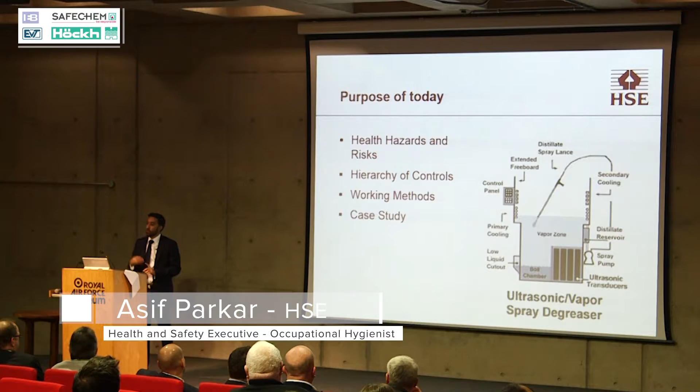Within the case study is an experience of one of our inspectors who is local to our office, and we'll be looking at specifically what the outcome was, looking at the bad practice and looking at what we could have done in that instance to improve the situation.

Okay, I'm sure you all know what solvent degreasing is, but briefly, solvent degreasing or solvent cleaning is the physical process of using organic solvents to remove grease, fat, oils, wax or soil from various metal, glass or plastic items. Historically, there are 5 main types of degreasing, one of which is hand degreasing. That is the application of a solvent by hand, removing during the cleaning process.

And then you've got the 4 main areas which I'm sure all of you know a lot about. So we've got cold cleaning, open-top vapor systems, conveyor systems and enclosed closed systems. Cold cleaning, generally speaking, this solvent is cold and then you apply the product within the area itself. And then more commonly you've got vapor degreasing, which applies to open-top conveyor systems and enclosed and closed systems. However, you can have cold cleaning systems which are used in the conveyor form.

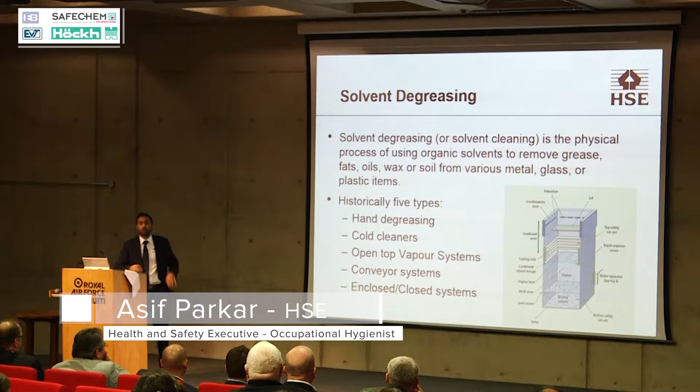What we are starting to see a lot more of within the workplace, which I've been advised by a lot of inspectors locally to me, is within the industry you're tending to find that a lot of organisations are moving to closed systems. And that's a good thing because obviously you are reducing exposure, reducing occupational exposure levels. There are also many benefits of doing that as well. What we've been advised is that there is higher productivity, and also we've been advised that the plant itself lasts actually a lot longer, duration of use. And also, more importantly, you're using less and less solvents as well. So that is a good change within the industry itself.

When you do decide vapor degreasing is what you should be doing and is the preferred cleaning method in that instance, though, you need to understand ways of improving the plant potentially that you currently have.

So we'll be talking about areas where we can improve plant later on in the talk. Obviously, adopting good practice, there are a lot of things you can do which could reduce exposure within the workplace. And also, fundamentally, you need to examine the benefits of using modern day plant.

Because obviously you might have plant in place, but it might be far more beneficial in terms of reducing the risks and health hazards in implementing a newer system within the workplace. Okay, so common solvents that we potentially use within the workplace: the most common ones are your chlorinated type solvents, things like trichloroethylene, dichloromethane, tetrachloroethylene, and also N-propyl bromide. They're probably the most common types potentially used within the workplace, and we are trying to phase these out as far as we reasonably can.

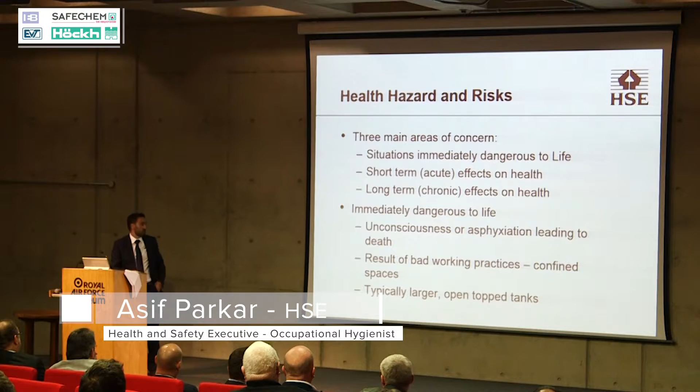A lot of open top degreasing tanks nowadays are quite large, so for example, if you are going into the area to clean out the degreasing tank, you will be exposed - the area itself could be defined as a confined space. And what we'll also be looking at is short-term acute effects and long-term chronic effects, which I'll be talking about in the next couple of slides.

So, with degreasing, there have been serious incidents which have occurred. What you need to take into consideration is when degreasers are being maintained - this has been the case even with enclosed systems. So if you are involved in enclosed systems, do ensure that you have the correct procedures in place. You should always have good working practices and standard operating procedures in place when undertaking any of these types of works.

This has also occurred when tanks are being cleaned out. So if you are cleaning open degreasing tanks or any form of tank, do ensure you have the correct measures in place. When solvent is being replaced is another big problem that we have within the workplace. What you find is, for example, when you add cold solvent within a hot degreasing tank, that solvent will quickly vaporize within the air itself, causing an extremely large exposure to that potential substance within the area.

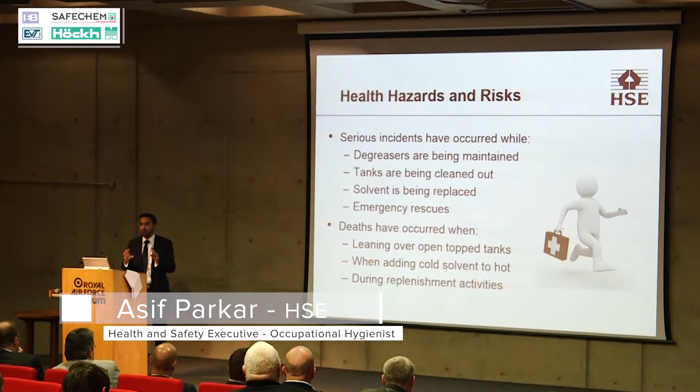So in essence, you're getting a very high exposure very quickly, and deaths have actually occurred as a result of that. Emergency rescues - this is also a very, very important point.

For example, say there's been an incident within an area, you need to ensure that you have safe working procedures in place when involved in any rescue, or it might be, say for example, a large spillage. You need to ensure that you have the relevant cleaning procedure in place in those instances.

Also, other scenarios - deaths have actually occurred when leaning over open-top tanks, and also during replenishment activities. I talked about how when cold solvent is added to hot solvent, it quickly vaporizes within the air itself.

Generally speaking, acute effects are short-term effects. These effects generally occur straight after exposure. Common types of effects with solvents are dermatitis, and also defatting of the skin. We've got an example there showing dermatitis as a result of exposure to solvents. You've also got various narcotic effects - dizziness, nausea, headaches, fatigue as well.

What I'm going to talk about in detail here is exposure to dichloromethane, because this has been an area where we've seen a lot of incidents occur recently within the workplace. Dichloromethane itself, within a poorly ventilated area, even when exposed to small amounts, can produce very, very high concentrations within an area very, very quickly. There have been some instances recently whereby exposure to dichloromethane has actually led to death within the workplace.

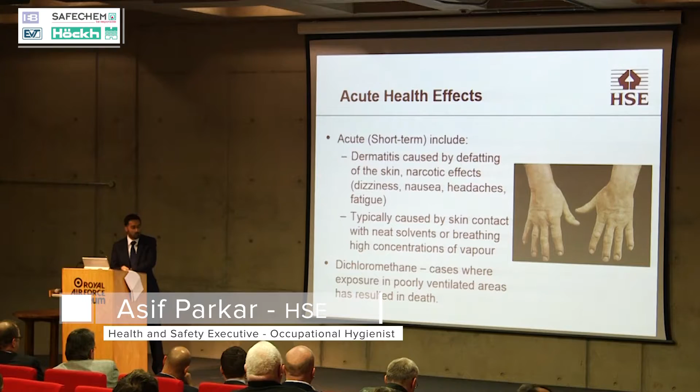The other effects from solvents within the workplace are our chronic effects. Generally speaking, you're exposed to small amounts of a solvent over many years, and then over time the effect may then happen. So you've got things like liver diseases, nervous system damage, and dermatitis.

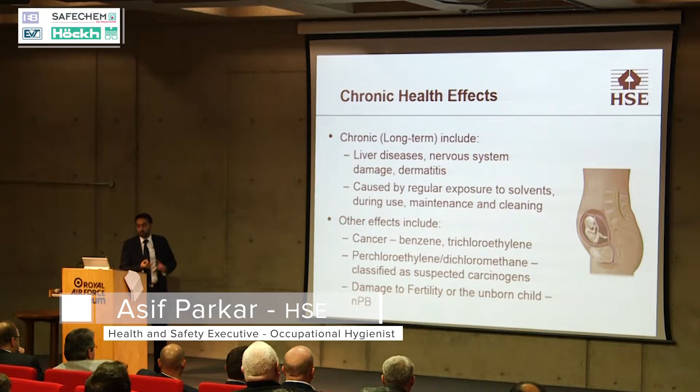This can also occur from maintenance activities and cleaning. Some of the common solvents we've got within the workplace - benzene and trichloroethylene, which are known carcinogens. You've also got perchloroethylene and dichloromethane, which are classified as suspected carcinogens, meaning there isn't enough evidence to determine that it is a carcinogen, but it is suspected. And also NPB, N-propyl bromide, is known to damage fertility and cause harm to an unborn child.

So what we need fundamentally is a suitable and sufficient COSHH assessment. This will show us how we can use this substance safely and put the relevant controls in place for us to work effectively and safely with that product itself.

So what we do is gather information on the solvent itself, through various sources. The first place we'd all probably look at is the material safety data sheet. This will give us specific information about the substance, the potential toxicology, any exposure limits, and it will give you pointers in terms of controls for using the substance itself.

What you also need to understand is how the substance is used within the scenario. If you are working with degreasers, you need to understand the process and also think of the secondary tasks as well. You do need to have COSHH assessments in place for the cleaning and spillage side of things, understanding all the different processes involved, because there is potentially high exposure within these activities.

Say, for example, you are cleaning within a degreasing tank - think how employees are exposed and the routes of entry. We've talked about inhalation, ingestion, skin contact, and skin absorption. Do understand all these routes of entry and make sure that is considered within the COSHH assessment itself, and also the extent of the exposure.

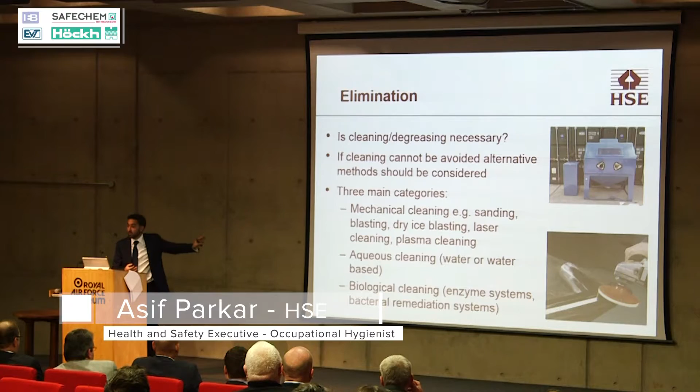What you do need to bear in mind as well is by introducing these different methods, the same principles still apply. You'd still need to take into consideration the hierarchy of controls, make sure you have the adequate COSHH assessment in place, but also you need to understand the other health hazards and risks associated with those. So say, for example, I've got the example in the bottom right-hand corner whereby someone is using a grinder - there will be other known health hazards and risks associated with that. It might be the case that you need to look at the vibration side of things, because obviously that would be a hand-arm vibration problem there. So we'd have to look at things associated with that.

You've also got aqueous cleaning, so this might be water-based. We have seen within various workshops that this is slowly being introduced. We've seen this within car workshops and places like that, where that has been introduced, and that has been quite effective. You do have different types - it might be acidic or alkali type solutions, but it is predominantly water-based. So that is moving completely away from the use of solvents.

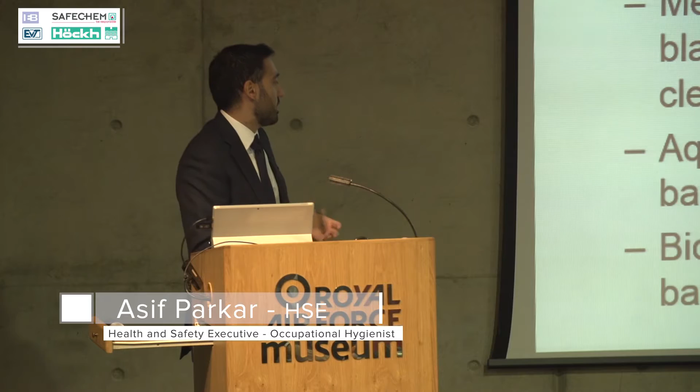And then also you've got biological cleaning as well. So these are generally enzyme systems, bacterial systems as well. So these are being introduced as well, and these are quite useful, from what I understand, for getting rid of things like fats and degreasing greases within systems themselves. And types of substances used here are generally things like terpenes and limonene-type based substances.

Okay, so solvent degreasing, substitution. If solvent degreasing is necessary, what we should always try and do is - I know trichloroethylene, dichloromethane, and some of the tetrachloroethylene give you the finish that you require, but are there suitable alternative less hazardous substances out there which are available to us which will give us that same finish? You should try and always look towards substitution.

So what we're finding nowadays is there are modified alcohols, hydrofluoroethers, dibasic esters, ethyl lactates, petroleum distillates, which are being introduced and becoming more and more effective, and more organisations are moving to these types of substances within the workplace. But when you do switch to these types of substances, there will be some adjustments that you will need to make within the systems themselves.

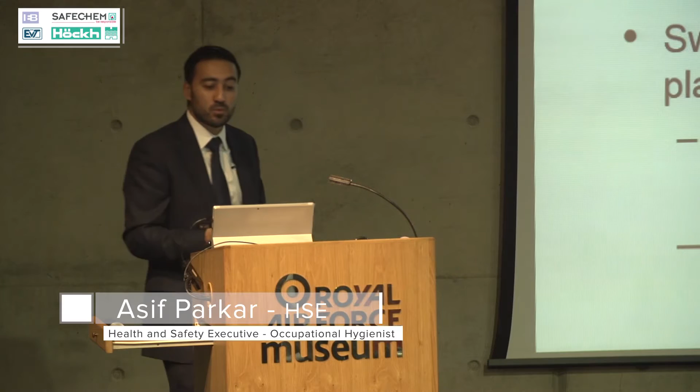They may also introduce other risks, so there is also a fire risk. A lot of these substances, like petroleum distillates, are flammable, as are some of these alcohols, and you do need adequate precautions. If you implement any of these other types of solvents, you need to gather further advice from suppliers, who will provide information on the boiling point and what measures you need in place in those scenarios.

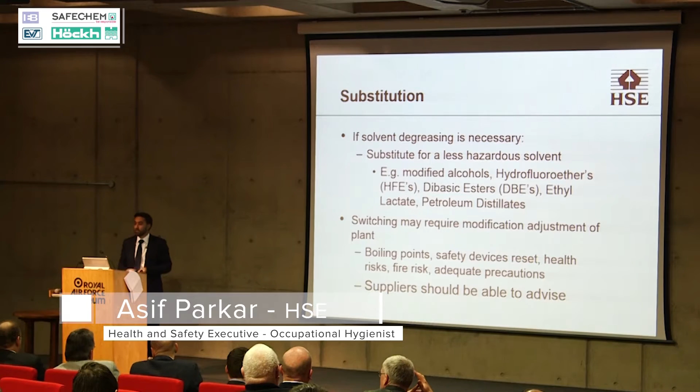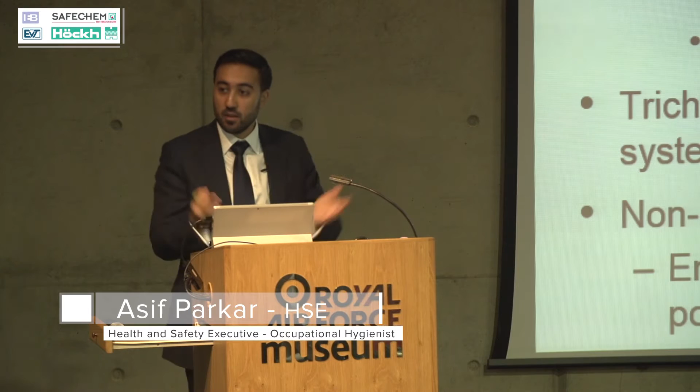If for whatever reason you can't substitute, you should look at enclosure and engineering controls. Ideally, the best solution is to completely enclose the process itself. So with trichloroethylene, for example, that should be used within a closed system because there are certain restrictions on it. By designing a closed system, it will minimize the emissions, minimize potential exposure within the area, minimize the release, and minimize the spread of the vapor.

If you can't enclose the process itself, which you should always try to do if possible, you should try to enclose as far as reasonably practicable. For example, if you've got an open top tank, what you could do is retrofit a lid or door within the top itself. That could be a simple way of reducing potential exposure within the area.

You could look at tank lids, and you can also incorporate segmented lids. That's useful on long degreasing units, as they allow partial opening within the area for degreasing smaller items.

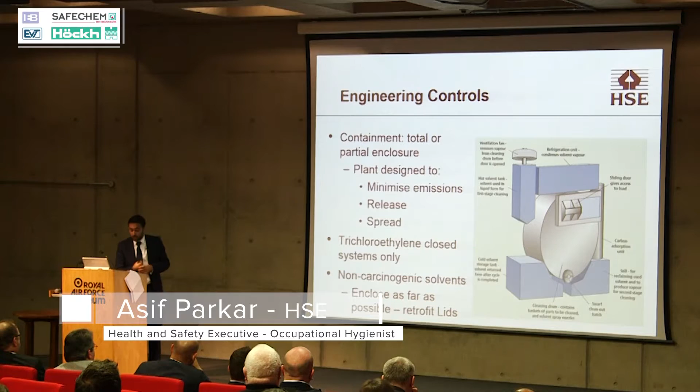Also, you could look at sectional lids or roller shutters. These could be used, for example, when you need an opening to drop down the degreasing components within the area, so you could close and open the process as and when required.

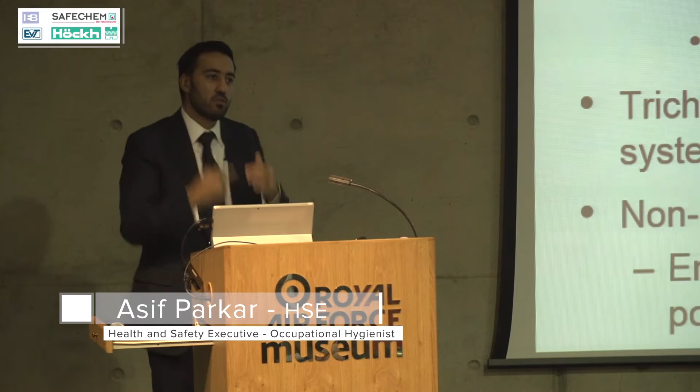If you do incorporate lids, you need to ensure they are positioned in areas which don't introduce a further hazard. For example, if you've got a degreasing tank with a lid incorporated quite close to the lip ventilation around the system, make sure that it's in an area which won't interfere with the lip ventilation, as that would reduce the efficiency of the extraction within the system.

There are also other engineering controls we can work with when looking at open degreasing tanks, such as the cooling water supply. It's very important that you always have the correct flow and temperature within the system. If this is set correctly, your system should work more efficiently. Make sure you gather the relevant information from your supplier, because they will advise you on the correct cooling temperatures.

Also, you've got the freeboard zone, which is the area above the open top vapor degreaser, above the cooling coils. What you need to do is try to reduce movement within this area. You will always get some movement from the vapor given off as it's heated, and you will also get turbulence if, for example, you've got an open room with airflow within it, so you need to control this.

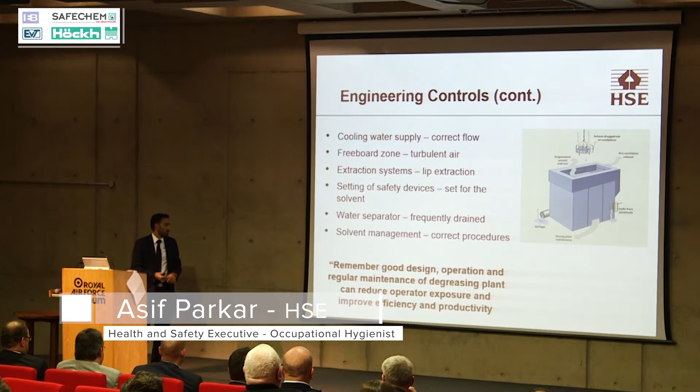And finally, remember: good design, operation, and regular maintenance of degreasing plant can reduce operator exposure and improve efficiency and productivity. With fully enclosed systems, what is key is having the loading and unloading procedure in place.

What you can do is introduce ways in which you take out the degreasing components. So if, for example, you take out a part really quickly, that will increase the solvent within the area very rapidly, increasing the potential exposure, and can also create excess drag within the area itself.

So what you could do in that instance is have a mechanical hoist, at a much slower speed. If you take out the degreasing components at a much lower speed in a controlled manner, you're not going to be potentially exposed to large amounts of solvent very quickly. It also eliminates the task of someone doing that manually, so by engineering that out, it reduces the potential exposure within the area.

Also, you should always allow for sufficient time drying within the freeboard zone. Once solvent has gone through the process, always allow sufficient time within that zone. Don't always take it out straight away, because that would increase exposure very rapidly. You need to ensure that the solvent contamination on those components has reduced as far as possible.

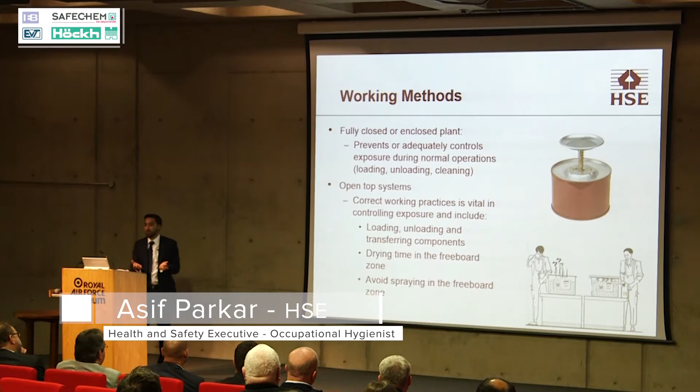I've also got a picture of a hand pump there. If you are solvent degreasing by hand, there are certain instruments out there within the workplace which are quite good, easy to use, and can potentially reduce exposure. If you're using cloths and things, you can push directly on the hand pump itself - it will dose directly onto the pump, and then you can apply it.

If you do use any rags or things, do ensure that once you have cleaned the component itself, you put that within a labelled container.

Other working methods you need to consider: the clean out procedure itself. What you'll find is degreasers can become contaminated with deposits and sludge. So with open top degreasing tanks, you need to ensure you have regular maintenance of plant, and manage the solvents you use within the workplace. If you have solvents which you are constantly using, make sure these are regularly cleaned - this will also improve the throughput and increase efficiency within the system.

You should always consider the method of cleaning, and entry into degreasing tanks is very important, as you are more likely to be in an area which could potentially be a confined space. So make sure you have your safe systems of work, permit to works, if you identify it as being a confined space.

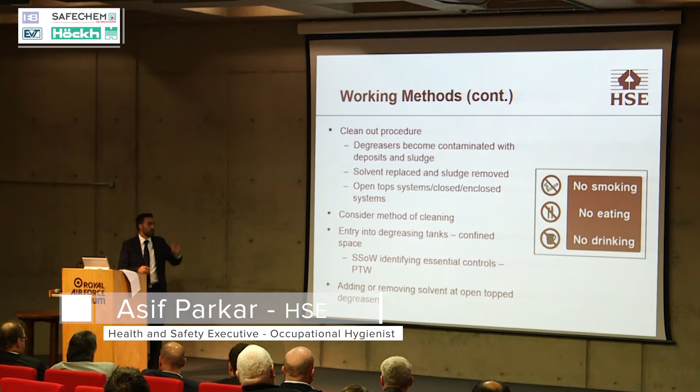As I stated earlier, the use of PPE is the least effective control. What you should be doing is looking at substitution, elimination, engineering controls, and administrative controls, and PPE should only be used with other controls in place.

It will require careful selection, use, and maintenance. If you are using gloves, you need to ensure you have the relevant glove type. Certain solvents will break through gloves very quickly, so you need to understand the breakthrough times of the gloves themselves.

Also, everyone has different hand sizes. Make sure that you do use the correct size of glove for that person.

If you do introduce respiratory protection, there's a number of things you need to do, and that is for both non-disposable and disposable type RPE - you need to ensure the operative has been face fit tested. Also, if you do introduce RPE, what we commonly see is RPE is not readily available within the area itself.

The filter type is incorrect. It's not protecting the worker from that potential substance. So make sure you always have the relevant filter media.

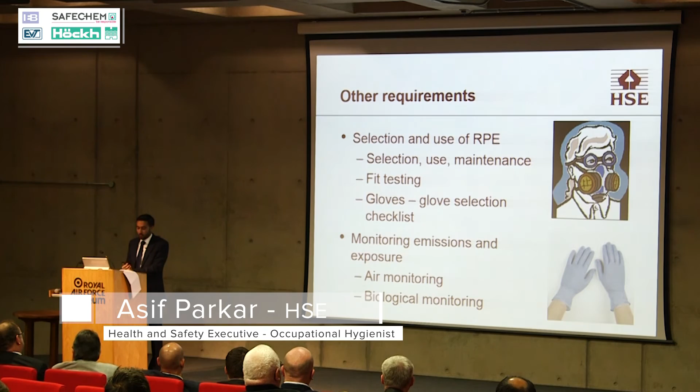It might be an exhale breath test, urine tests, or blood tests. Certain substances, dependent on the type of substance, will have a particular test used to see if that substance has entered the body itself.

However, when it was implemented, it had never been tested, it had never been commissioned - they didn't know whether it worked properly.

So there was no general extraction, no PPE used or worn within the area itself, and obviously a large exposure to trichloroethylene within the area itself.

What had happened was 6 months after the degreasing tank was installed, one of the operatives had started to incur breathing difficulties, chronic shakes, fatigue, and what the GP recorded was a 20% decrease in lung function.

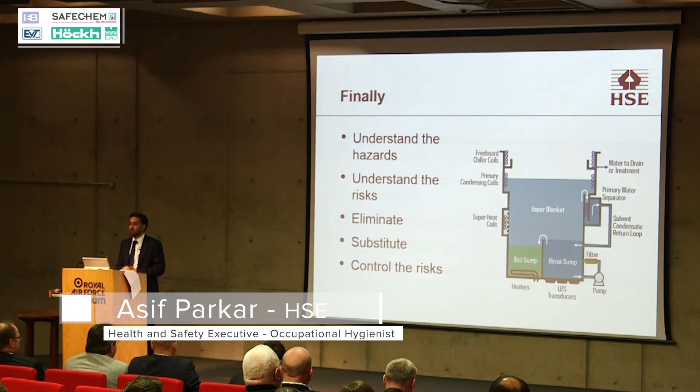Look towards elimination, substitute wherever possible, and fundamentally always try and control the risks within the workplace. Always look to enclose a process, include retrofit lids, for example, in open top tanks. By taking these steps, you could make a big difference and work safely with solvents.